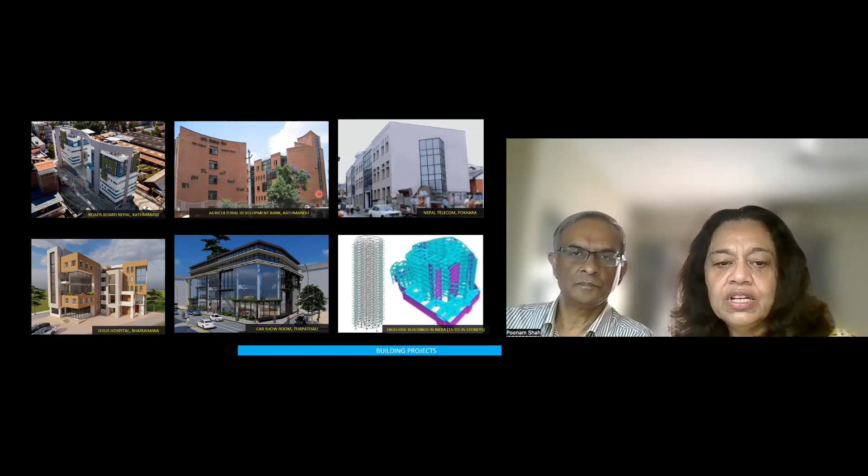So I'll explain to you some of the architectural projects that we've done recently and in the past. A recently completed project is the Roads Board building, which is an office building. We've done banks. One of the first projects that we did was a bank, and it was in a prime location right next to a Louis Kahn building. We've done another office building in Pokhara, not in Kathmandu, then another hospital outside the valley.

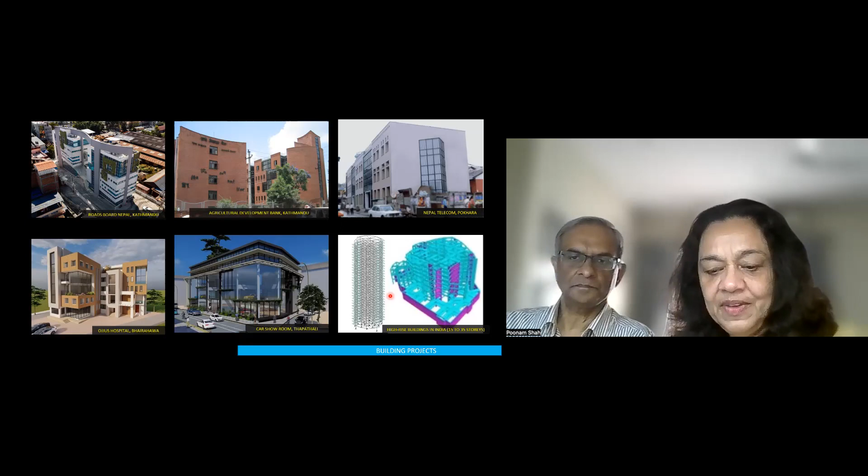This is a project that is just coming in. We are into a boom of car showrooms in Thapatali area. Mr. Grover would know it. It's in a place you are living very close by. We have been working with an Indian firm, and we designed their structures. So we did more than 30 structures, and some of them 35 stories. So this is what we did some years back. We have also done buildings for banks, remodeling their existing buildings and building new ones.

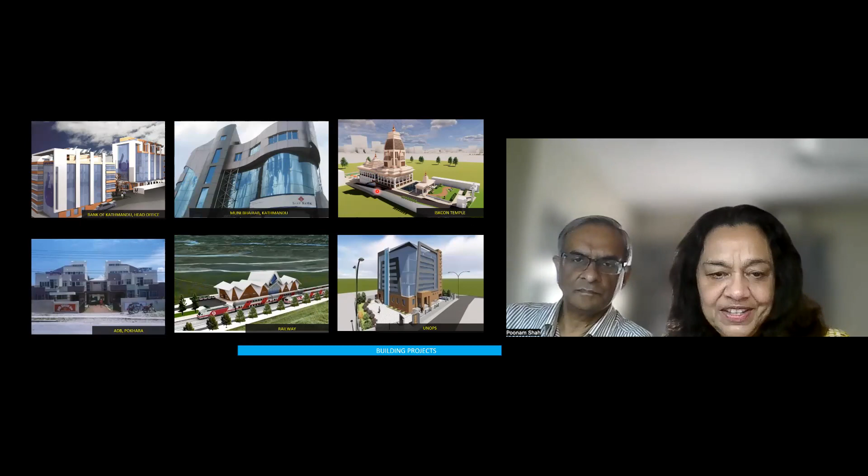One of my favorite projects is a commercial complex, in which I tried to capture motion in physical form. We also had an opportunity of doing an ISKCON temple in one of the remote areas of Nepal. Then another bank, and we have also done railway stations, and we designed almost 30 railway stations. And railways is something that is very new for Kathmandu or Nepal. So this was the initial project in which we were trying to set up guidelines of how the railways should be and how the railway station should be.

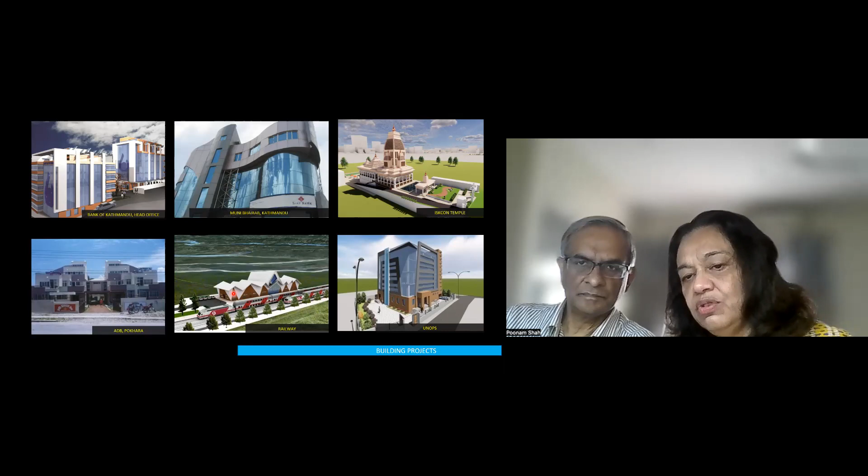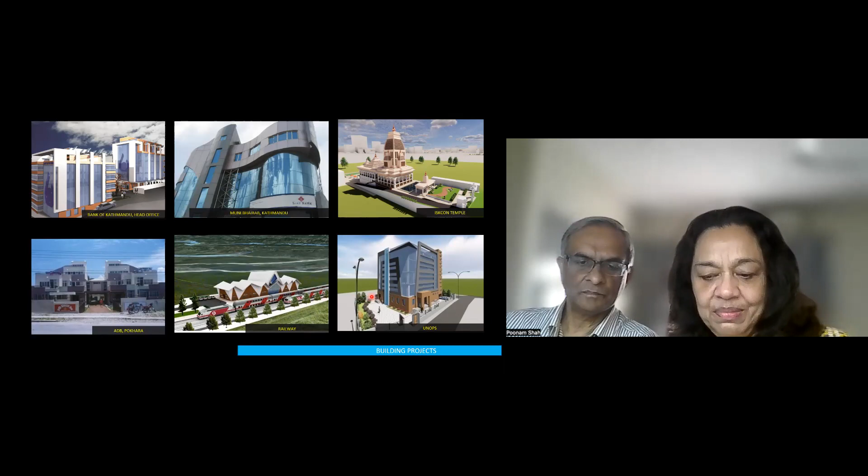We also did some work for the police of Nepal, and this was through the funding of DFID. So we designed police stations, their barracks, their prisons. So we did a lot of research, trying to deliver what would be built. These are some of our project proposals that we put in for some banks, still under process.

Our latest project, I don't know if you all have heard, So Karod Ka Kamal. We did a DPR. The firm OAC approached us to prepare a DPR for that project. This is at Ram Mandir in Ayodhya. So this is also under process. So I hope it will be built and you'll be able to see the wonderful fountain which depicts Ram's life. Okay, and I'll hand over now to Sanjeev. He'll explain further on what we do.

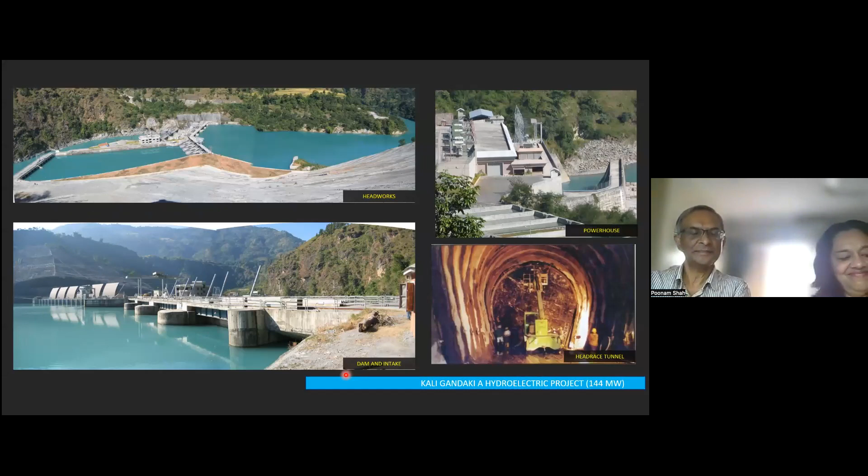I'll just briefly discuss some of the hydro projects and some other interesting projects we have done over the years. In the hydro sector, we have done, I think, more than 25 feasibility studies for various sizes of projects. We have done the detailed design and then construction supervision and construction management of these mega projects. The project that you see on the screen was completed in 2002. We worked with an American consultant. And till 2 years ago, this was the largest hydropower project in Nepal.

On your top left screen, you see the dam and the water intake. And this slope that you see was a very problematic slope. We designed that. It was about 100 meters high. And till 10 years ago, it was the highest man-made slope in Nepal.

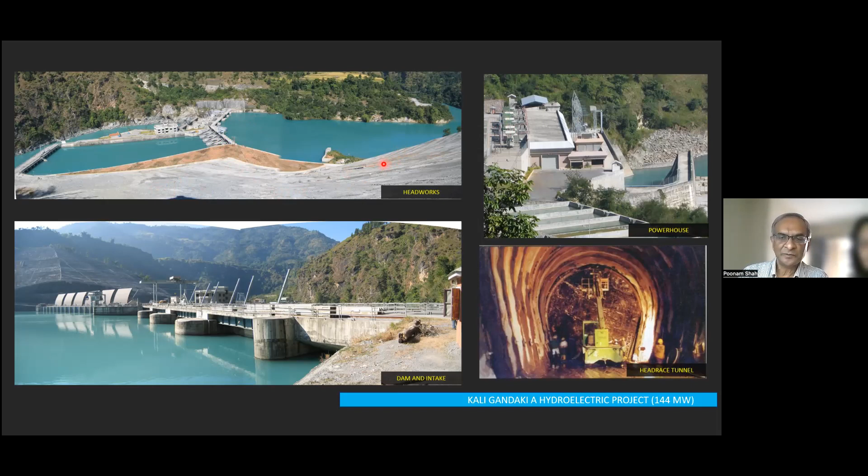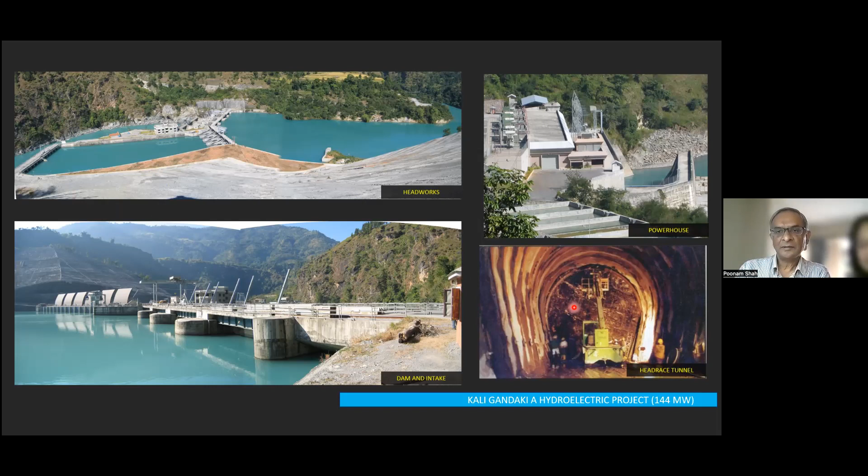At the bottom, you see a close-up view of the dam and the intake on this side. And this 100-meter slope that I'm talking about is over here. The water enters through this slope and goes to the powerhouse through a tunnel. This is the tunnel. It's about 7 kilometers long in very poor rock. And then on the top, you see the powerhouse where we have 3 generators for generating about 144 megawatts.

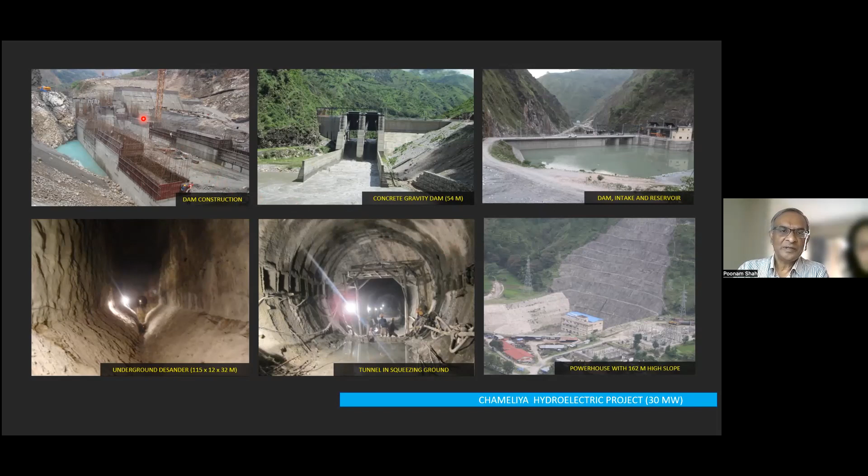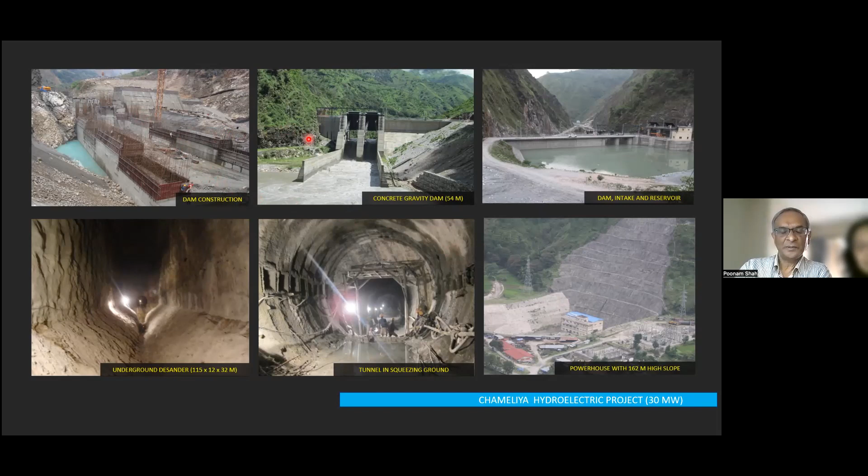So on the top left, you see the dam that was built. This dam was about 24 meters below the riverbed level. So you're talking about 8 stories of building, and then 30 meters above that. In the middle, you see the finished dam, which looks small, but actually is 54 meters high. And then on the right side, you can see the reservoir that was formed behind that dam.

This is what we call the desanding basin. This is about a 120-meter long and 32-meter high underground cavern. And this is used for removing the sand and the silt in the water.

And this was the most challenging part. The project had a 4-kilometer long tunnel, and the diameter of the tunnel was 5.2 meters. But because of very poor geology, as soon as we excavated the tunnel, it used to squeeze to about 3 meters. So we had to spend a lot of design effort and time to bring in special methods. We designed those methods and we successfully commissioned this project. And there were some international experts who came in, and they have also acknowledged that this is one of the most difficult tunneling projects in the world.